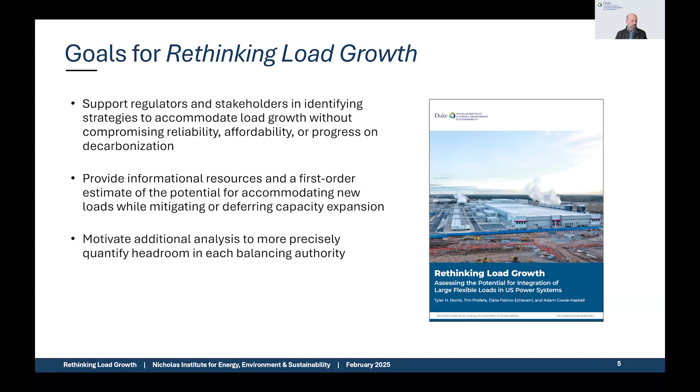Very quickly to set the table, I think almost everybody who would join this would be aware that load growth is really on a collision course now with the resource constraints of our energy system. We have major load growth projections coming in, first from the electrification of other sectors, from the reshoring of manufacturing that we've been seeing over the last 3 to 4 years, and then it really intensified with the AI revolution and the hyperscaling of data centers to service it.

At the same time, we have constraints on getting electricity on the grid to service this. We have challenges from interconnection, from transmission, from setting up the infrastructure we need. And so, I think we come to this question with the view that we need every tool in the toolkit to be able to address this problem.

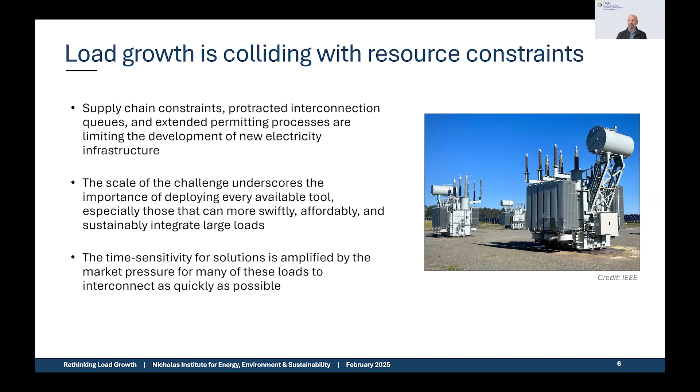And particularly, we need to find tools that can tolerate the delays that we may see in the longer-term challenges that we see from siting and interconnection and the like. Next slide, please. And we particularly want to look at load flexibility as possibly offering such a near-term solution, a place that we can use the headroom that we see in the existing infrastructure to be able to serve the needs and the economic growth that we want in this country without being fully challenged by some of the constraints that I just discussed.

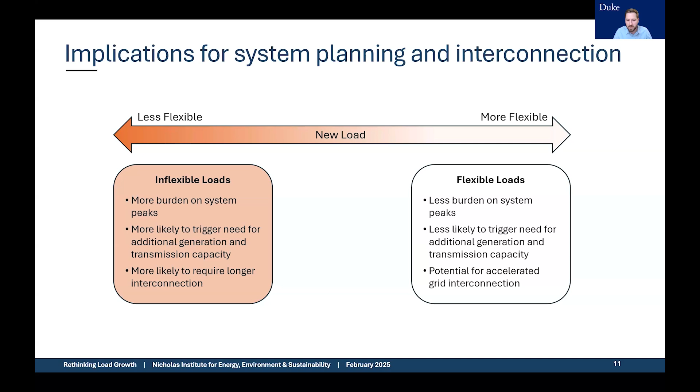These issues raise increasingly consequential considerations today for regulators. The case of Virginia, of course, is well known, given the very high concentration of data center additions there. But these issues are arising in a variety of other jurisdictions, many of which have caught headlines. In Ohio, AEP, after confirming 5 gigawatts of new data centers, received an additional request for 30 gigawatts of data center capacity, and therefore implemented a temporary moratorium on data center requests in 2023.

They recently achieved a settlement agreement with consumer advocates that calls for longer contracts, load ramping schedules, minimum demand charges, and collateral for service for data centers above a certain size threshold. Similar issues have recently come up in Georgia, where 7.3 gigawatts of large load customers committed to receive electric service from Georgia Power, in response to which the Georgia Public Service Commission implemented changes to customer contract provisions, which include allowing the utility to seek longer contracts and minimum billing for cost recovery.

And then a similar case in Indiana, where data center service requests represent nearly a 160% increase in the peak load for Indiana Michigan Power over the next 6 years. And some stakeholders there propose firewalling the associated cost of service for those data centers from the rest of the rate base. And these are just 3 select examples of a phenomenon that is growing in a variety of jurisdictions and presenting unique challenges to the regulators.

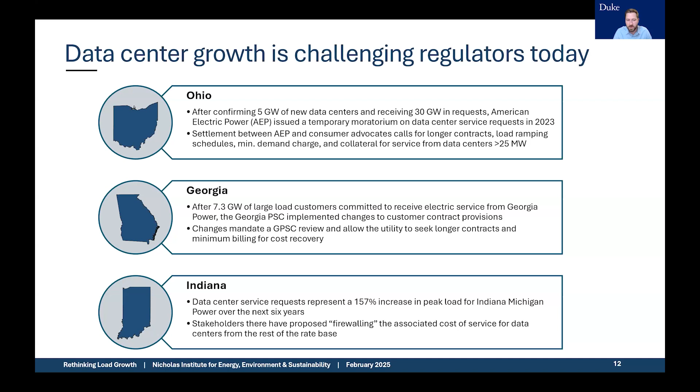And we think these examples underscore the significance of exploring how flexible load can potentially mitigate these peak increases and optimize system utilization in a way that may be able to benefit the existing ratepayers and also reduce the urgency for costly and time-consuming capacity additions.

Our report characterizes 4 general types of load flexibility. And so these range from on-site power and storage, which of course could be battery storage, it could be different forms of renewable power generation, or other forms of generation. We have seen behind-the-meter natural gas become a growing area of interest. And of course, many of these data centers do have on-site diesel, which has been constrained in its ability to operate due to various environmental restrictions.

The category of temporal flexibility, which is essentially scheduling computational loads before or after these periods of the highest system stress, which we also demonstrate are generally relatively short in duration. The average was approximately 2 hours for most of the scenarios, although they can, of course, be higher than that depending on the system conditions. The category of spatial flexibility, which is an area of developing interest for hyperscalers, which is distributing computational workloads across one or potentially multiple data centers in different geographic locations.

And then the fourth category, of course, is the ability to simply reduce operations during defined periods. This may be less appealing for certain data centers, but for other computational loads, it may be more manageable. And we have seen that to be the case with a variety of Bitcoin and cryptocurrency computational loads, which we also highlight.

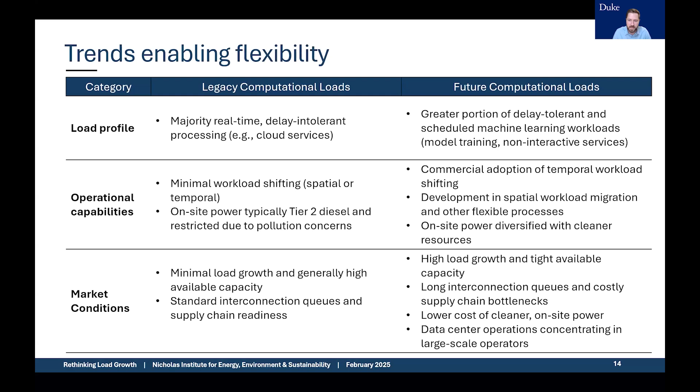And then the third factor under market conditions here is this growing concentration that we're seeing of computational load in co-located or hyperscale data centers, which lends scale and specialization to more sophisticated data center operators.

We highlight a few select examples of implementation of large load flexibility, and in particular computational load flexibility in the report. One example, of course, is Google data centers have been documented as participating in various demand response programs in North America and in Europe, and they are implementing carbon-aware temporal workload shifting, as well as geospatial workload shifting. There are documented examples of Enel X supporting data center demand response participation and transitioning to on-site batteries and other on-site generators in order to island within minutes.

Verrus is a new company spun out of Sidewalk Labs, and the premise of its business model appears to be developing flexible data centers with different architecture and leveraging more distributed resources to offer flexibility. Enchanted Rock has supported hyperscalers in installing primarily on-site gas generators for data centers that do offer flexibility. And so it is important to note that flexibility is not necessarily favoring any particular technology type or another. There are a variety of different types of technologies that may support large loads in offering this type of flexibility. And then on the earlier stage side, there are startups like Emerald AI, which are developing software with advanced computational resource management for more precise demand response.

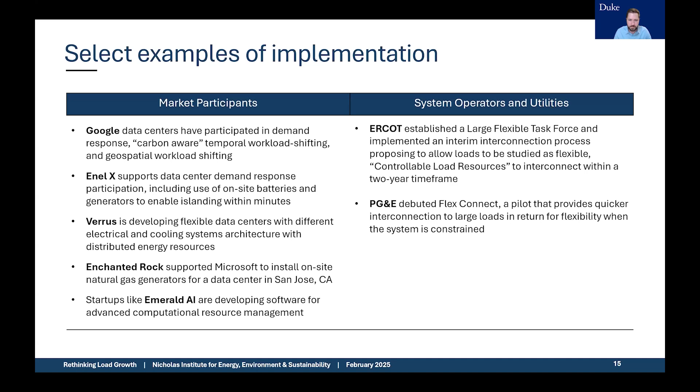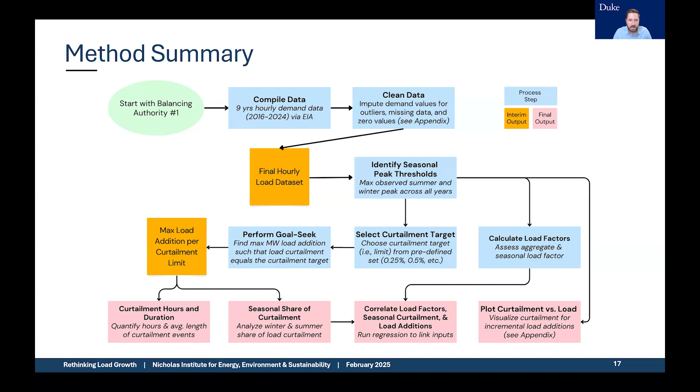We performed a variety of cleaning methods for this data that is documented, I believe, in Appendix B of the report. And then with this final hourly load data set, we then identified the seasonal peak threshold. And so in the next couple slides, we will discuss the identification of these peak thresholds and how they were applied, and then how the goal seek was performed to identify the applicable load accommodation capacity for each curtailment target.

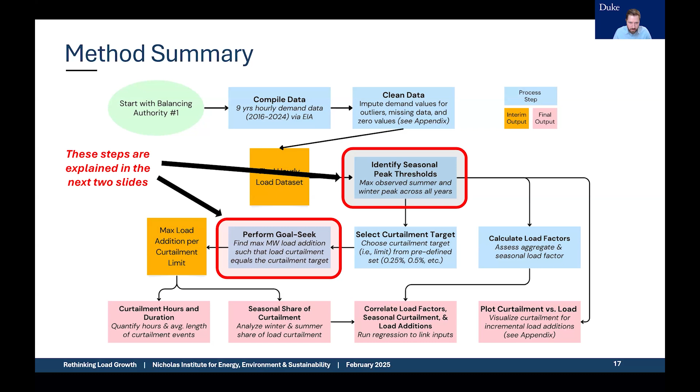So a key aspect of the method was identifying the maximum realized peaks for each balancing authority in the summer and in the winter. And so what you see here is an illustrative example for PJM, including 9 years of hourly load data, which here is represented as the single highest demand value for each day, just for visualization purposes. You can see in the upper middle portion of this figure where the maximum summer peak is determined over these 9 years, and on the left-hand side where the winter peak is determined.

And the basic understanding here is that each balancing authority develops resource plans that are capable of supporting these peaks. On top of these existing system peaks, there is also a reserve margin of generating capacity that is available. So we are discounting the reserve margin that is available on top of these existing realized peaks. These thresholds form the basis for the calculation of curtailment.

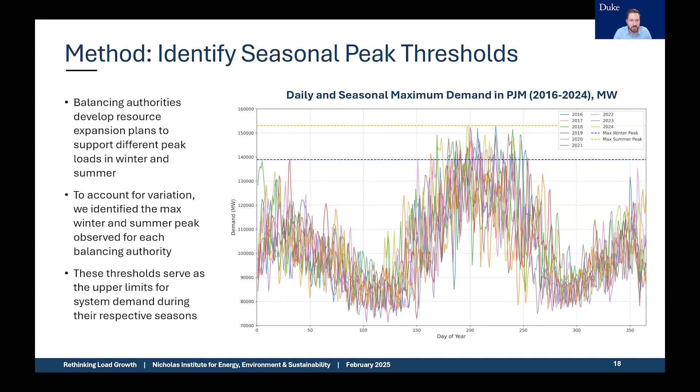And when we shift here to the next slide, we'll provide a visual illustration of the method. And so for consistency here, again, we show PJM solely for illustrative purposes during a week in January 2024. The y-axis on the left indicates the system-wide load. The x-axis represents the date and the time. And so for each balancing authority, we start with the existing demand curve, as well as the identified seasonal maximum peak threshold.

We then add constant load. It was constant in all hours, illustrated here by the green line. And this is just for illustrative purposes. The increment in this case is 10 gigawatts of additional load. And then the method is to calculate the amount of load that's in excess of the applicable seasonal peak,

and then aggregate each hour of curtailed load of the new load across all hours in the year for each of the years of hourly data that's available, and then to average the curtailment rates, average the volume of new load addition such that the average curtailment rate is equivalent to a predefined set of curtailment targets. And we chose these targets to be relatively consistent with existing curtailment requirements and demand response programs across the United States. We cite a couple examples in the Western markets of 2% annual curtailment.

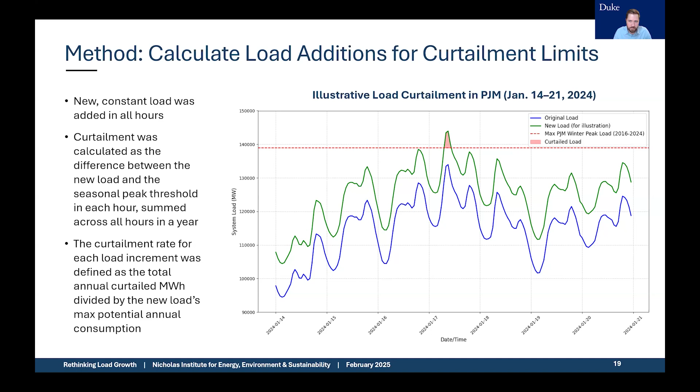So the results of this analysis are presented here. For a simplification of visual presentation, what's presented here are the results solely for the curtailment rate of 0.5% for the new load. We term this curtailment-enabled headroom. And you can see that in this case, the amount of available headroom in aggregate is 98 gigawatts across the 22 balancing authorities. And I should note that the 22 balancing authorities represent 95% of the aggregated US peak load. So it's essentially a proxy for the available curtailment-enabled headroom on a national basis.

When the load curtailment rate is reduced to 0.25%, there's 76 gigawatts of headroom available across the 22 balancing authorities. If it's increased to 1%, that available headroom rose to 126 gigawatts in total. And then if it was increased all the way to 5%, the available headroom, according to this method, would be approximately 215 gigawatts. And just for orientation, the existing aggregated national summer peak load is approximately 760 gigawatts. So at the 0.25% curtailment level, that would enable, according to this method, approximately a 10% increase in US load.

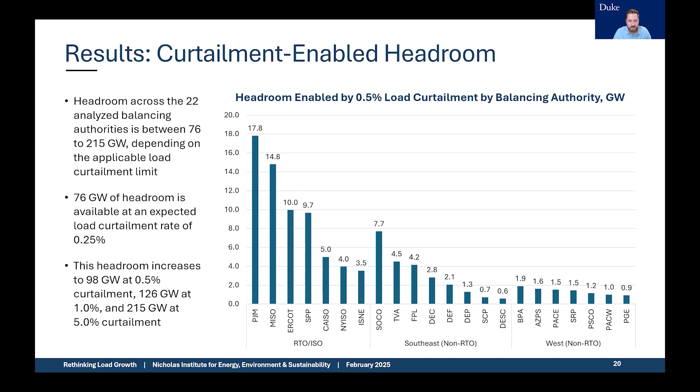To also visualize the relationship between the load additions and the curtailment rate, we also calculated the curtailment for small incremental load additions. In this case, it was an increment of 0.25% of each system's peak load. And so you can see that illustrated here again, just for illustrative purposes, for PJM. There's a similar chart presented for each of the balancing authorities in Appendix A of the report. But this plot captures the year-by-year variability in the demand patterns, and then it indicates the average of these years, which was the basis for the average figure that's presented elsewhere in the report.

And so you can see in this case that at a curtailment rate of 0.25%, as indicated on the left-hand y-axis, the load addition in PJM is at approximately 13,000 megawatts, and that it increases incrementally following an exponential or a quadratic trend up to approximately 23,000 megawatts at a load curtailment rate of 1%. And this curve generally aligns with our expectation that the curtailment rate increases more sharply as the load addition increases.

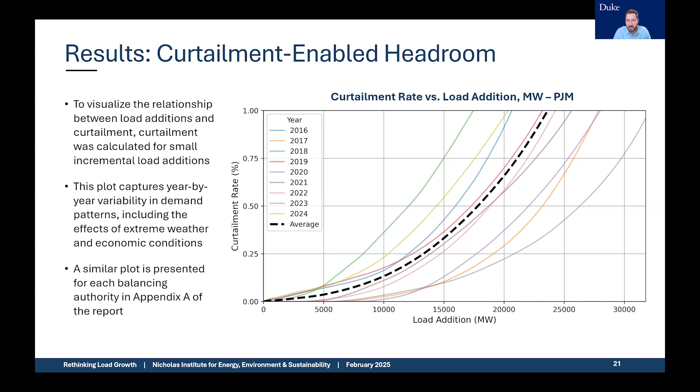We also analyzed the hours of curtailment that would occur on average for each individual balancing authority, but then aggregated across the balancing authorities. What we found is that a large majority of the curtailment hours retained most of the new load.

And so just to zoom in here to illustrate this, if we look at the 0.25% curtailment limit in the bottom left of this chart, what we see is that on average, there would be 85 hours of curtailment in an average year for the new load, when some amount of curtailment of the new load would occur. But in 73 of those 85 hours, at least 50% of the new load is retained.

And similarly, for 50 of those 85 hours, at least 75% of the new load is retained. And then in 24 of the hours, at least 90% of that load is retained. So on average, nearly 90% of the hours during which load curtailment is required retain at least half of the new load, and then 60% retain at least 75%, and about 30% retained at least 90% of the load.

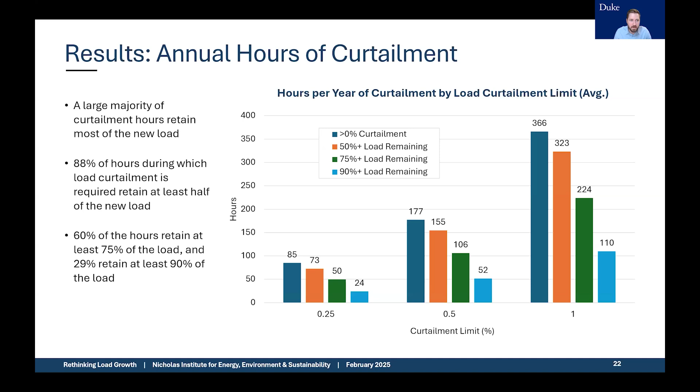And finally, we looked at the duration of the curtailment events on average. What we mean by curtailment duration is the length of time that the new load is curtailed when a curtailment event occurs. And what we found is that the average duration was approximately 2 hours for the 0.25%, the 0.5%, and the 1% curtailment limit. It then increased more substantially up to 4.5 hours at the 5% curtailment limit. And you can see the average for each of the balancing authorities presented here.

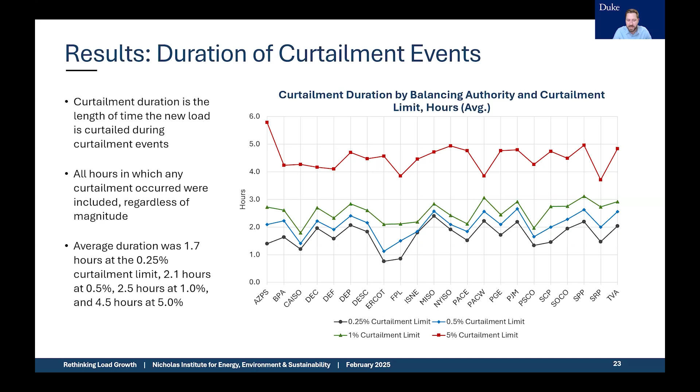I'll note that we also explored in the report the relationship between the system load factor and the load accommodation capacity for each balancing authority. We decided not to go into that level of detail for the purposes of this presentation, but I wanted to flag it in case there's interest. There's more detail on that topic contained in the report. And so with that, I will now turn it to Professor Dalia Patiño-Echeverri to talk about next steps.

Thank you, Tyler. Hello, everyone. My name is Dalia Patiño-Echeverri, Associate Professor at the Nicholas School of the Environment. And I'm going to talk about the next steps in this research. Next slide, please.

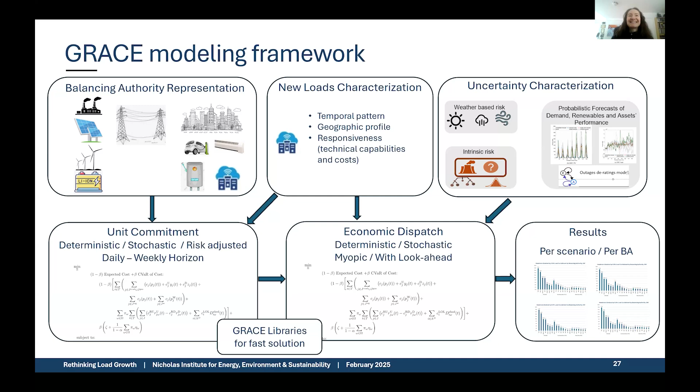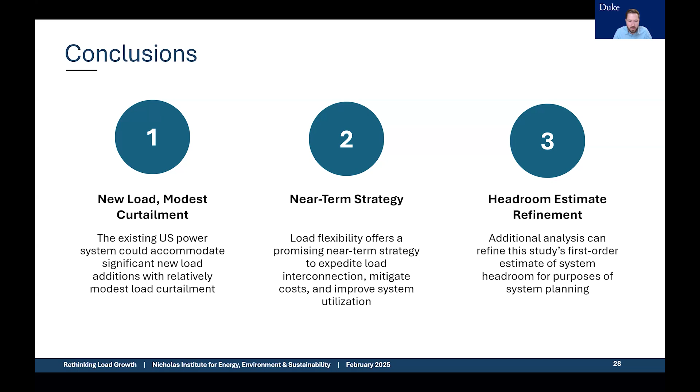So our first question here, and we're actually going to have Tim address this one, is who are the relevant stakeholders for this analysis, and what do you expect they may do with these findings? Thanks, and thanks for the question. As I sort of noted, I think we're really looking to use this analysis to inform the relevant decision makers regarding how we service loads. So that's the regulators at the state level, at the regional level, the sources of load, also the utilities, the federal energy policy makers overseeing the system.

I think that's all relevant, but I think what we really want them to do is introduce processes to interrogate the use of this headroom in planning processes. Definitely want awareness of some of the pilot programs like the ones that PG&E and ERCOT have initiated that we mentioned. And then, possibly, motivation for regulators to open proceedings to explore recommendations for how they should potentially enable this approach across their entire planning process.